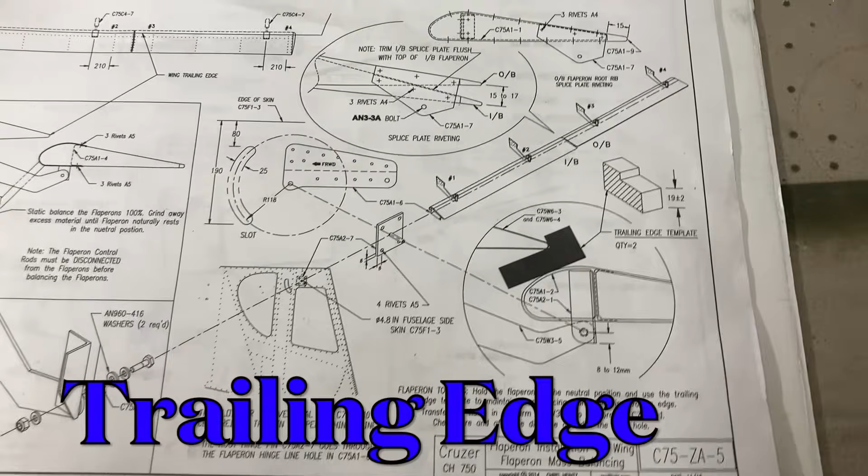The first thing we should go over is this little block here. I made a couple of them. They're supposed to be 19 plus or minus 2 millimeters for keeping the flaperon even with the trailing edge all the way across. The tricky part is this part here.

When we get to it, that's going to be the very last part of the video, when we're making the inboard and outboard connected, so that the outboard is tipped up slightly.

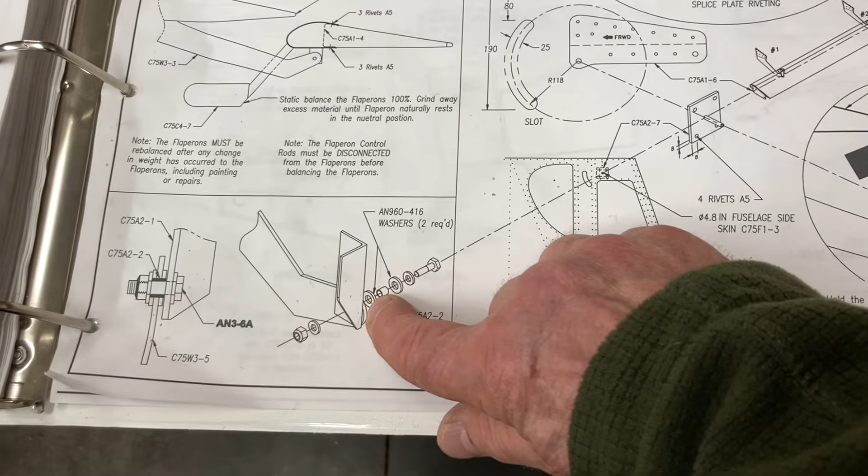This blow-up picture is a little deceiving because that washer is supposed to be between these two parts. I'm going to draw up another blow-up view so you can see how I'm going to do it without looking at this one. This is correct right here - I like that one.

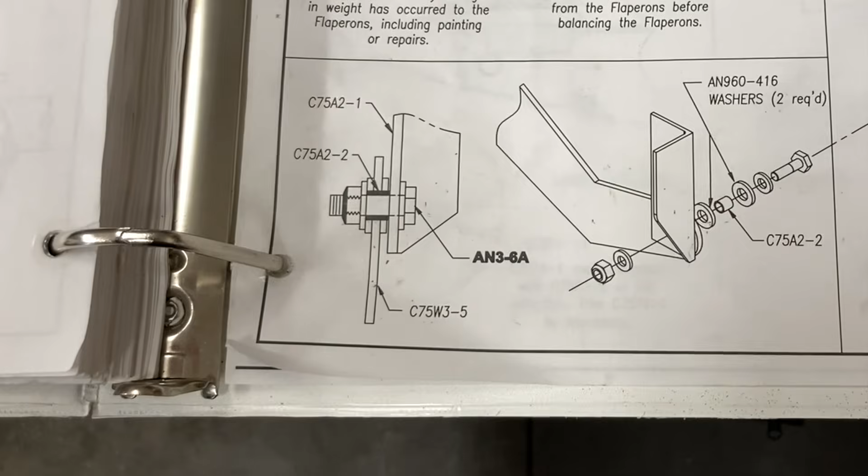The other thing is this part here, C75 W3-5 - that's the wrong number for that part. A bracket in the front of the wing holds the skin. The C75 W3-5 is this bracket that holds the skin and reinforces that interior piece. The part we're looking at here is W3-3, so this part here should be W3-3.

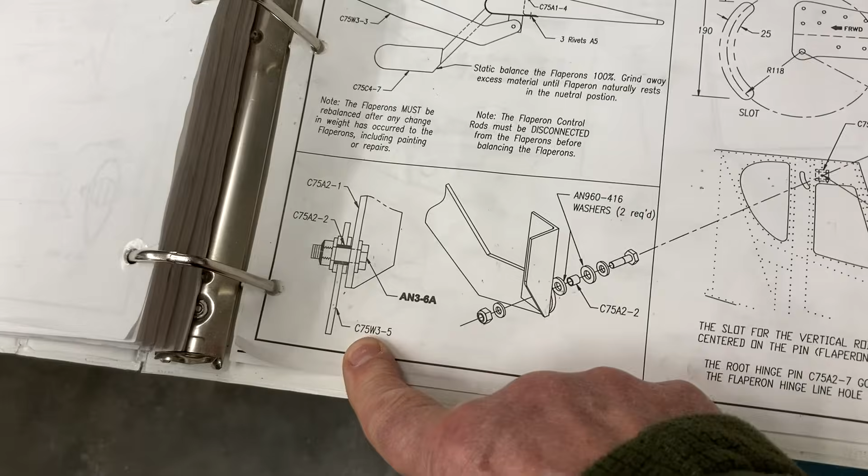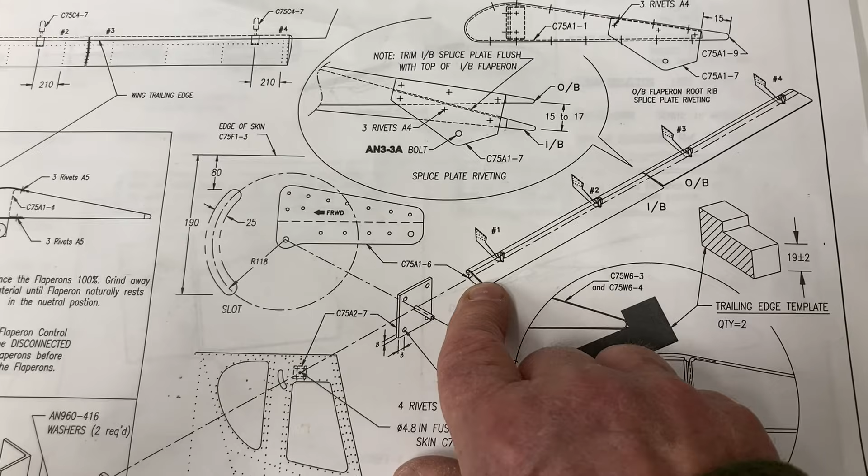As you can see, these all line up to this center point here. This lines up through here, this lines up through there. I get why they blew it up like that - it's really cool. But my starting point, I don't know if that's right or not. This is the way I'm doing it.

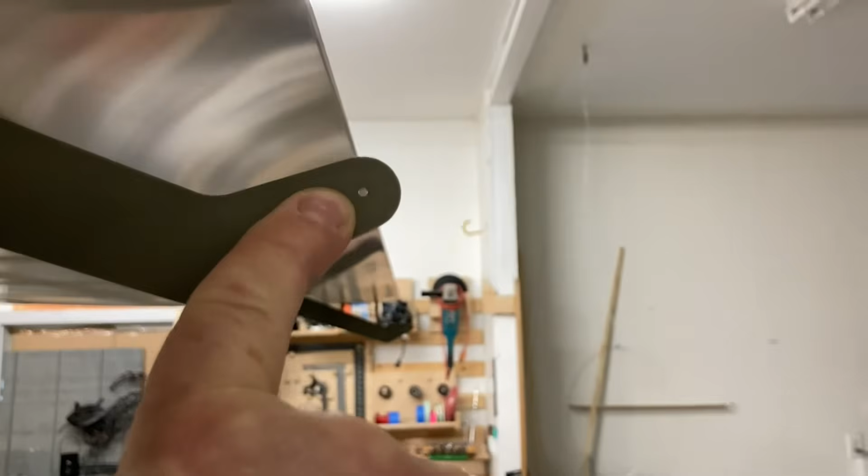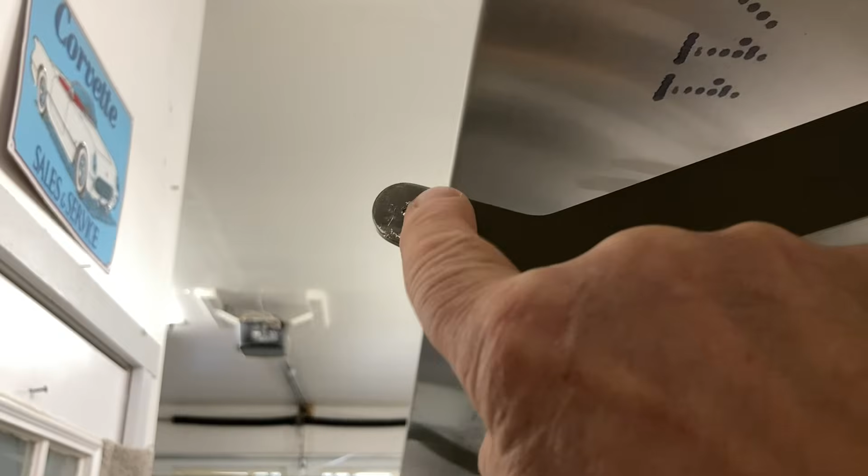My starting point was shooting a laser light down through all 4 brackets. They have a very small hole in them - I'll show you, a small hole in each one down there, and as you can see, those are your pilot holes, the centers. I'm not going to move those at all, we've got to use them.

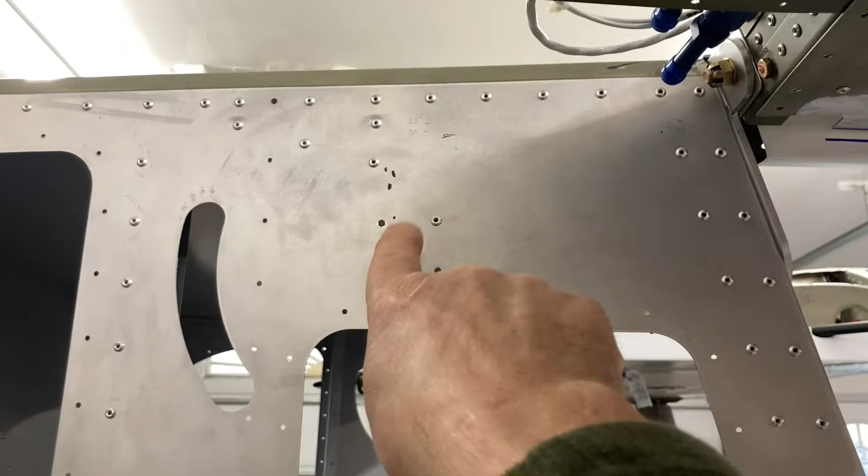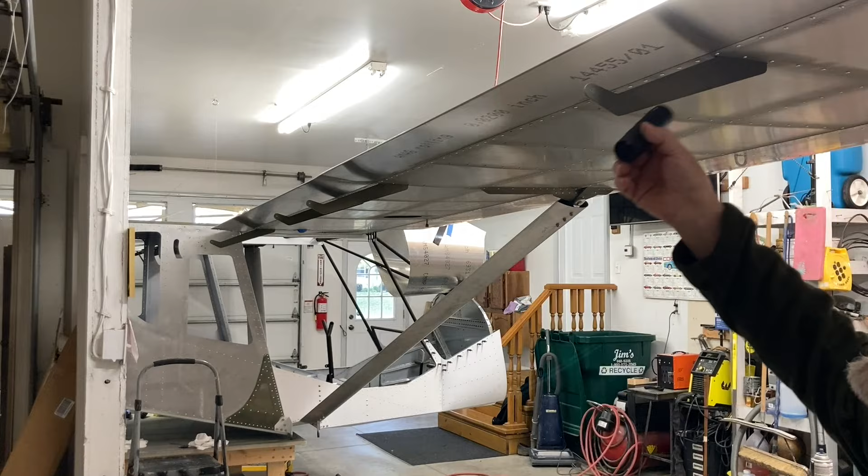I shot that laser down, and that ended up on here, and I put that bracket on, so that is a perfect pivot point through these holes all the way down. If you lined a light up down that, it would hit that. If these were off at all, the light probably wouldn't make it through all 4. This is just a standard laser that won't hurt your eyes because it's a camera.

Anyway, I'm going to start it here, support it with my fingers - I'm a bit shaky, but as you can see, it's lighting up that pole down there.

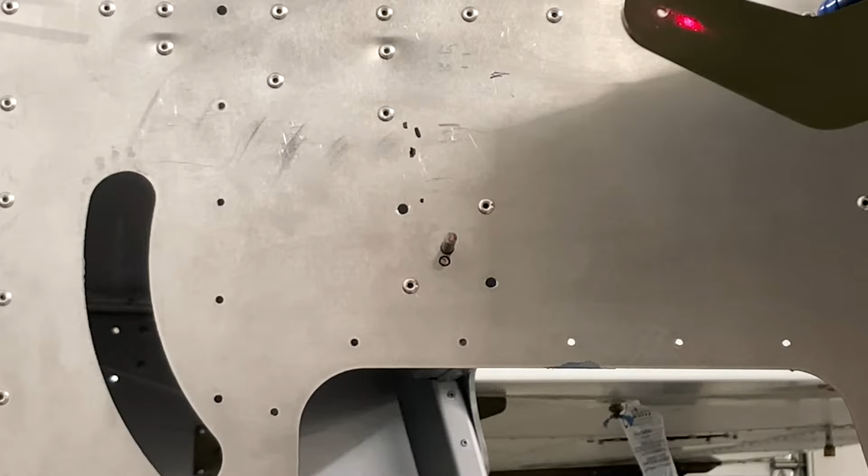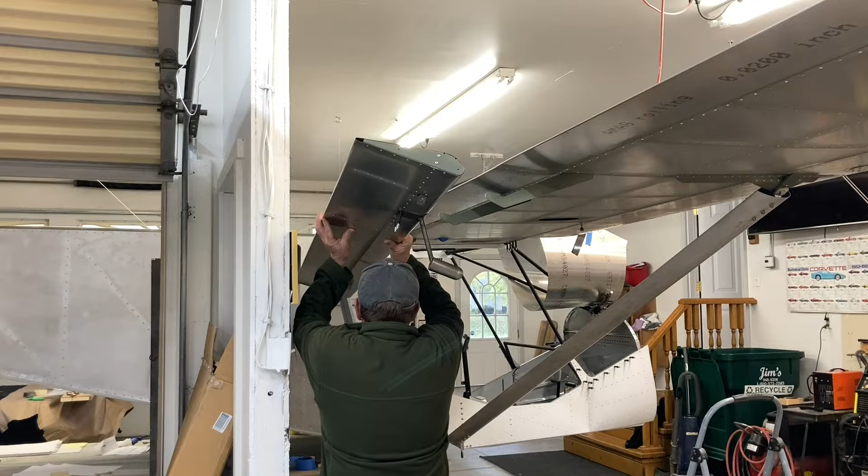Okay, I start with the inboard, for no particular reason other than there's a hinge down there where the light hit. We drilled a hole and installed the bearing. So that is our starting point, because that lines up with all these holes. That was my logic on that.

That'll sit there just fine until I find - needle nose vice grips work pretty good. Anything bigger or thicker gets in your way of marking the hole through this pilot right here.

Well, let's put the blocks in - I've got 2 of them made. This is just a preliminary thing. Center it on your L bracket, put this slightly down in the back because that's where it's going to be when attached to the outside, and lightly clamp that off. Here's my other vice grips - I'm going to put this one up as far as I can so that block touches. Block looks good.

Now the other thing is, I've got a straight edge here with a block taped to it that I notched, and it sets inside of it. That measurement right there is 15 to 17. I've got marks on there.

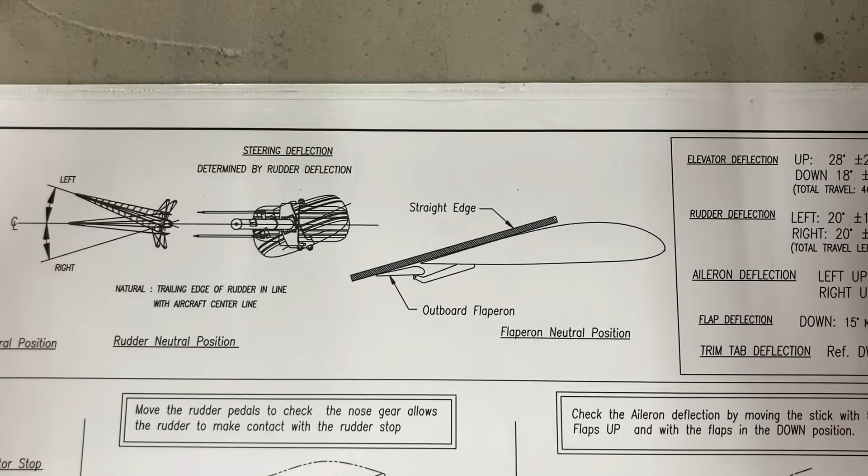That's because when we do the outside one, the neutral position is when you put a straight edge here and touch the center, or that first row of rivets - the second row kind of sits over that and touches the rear here. Then the flaperon comes up and touches - that's the neutral position.

But when these are attached together, this one's down 15 to 17 millimeters. I made a block here just so I could find out when I set this on, that that's the 15 to 17 right there.

Now it's important to tape it off. I slightly tape it off over there because every time I make an adjustment here, the angle changes. So now I can loosen this, put it halfway between right and left on that angle aluminum, angle iron - and that's the angle, that's where I want it.

This one is up all the way, blocks are in there good. Double check our angle. So right there is our neutral position if it was attached to the outside piece.

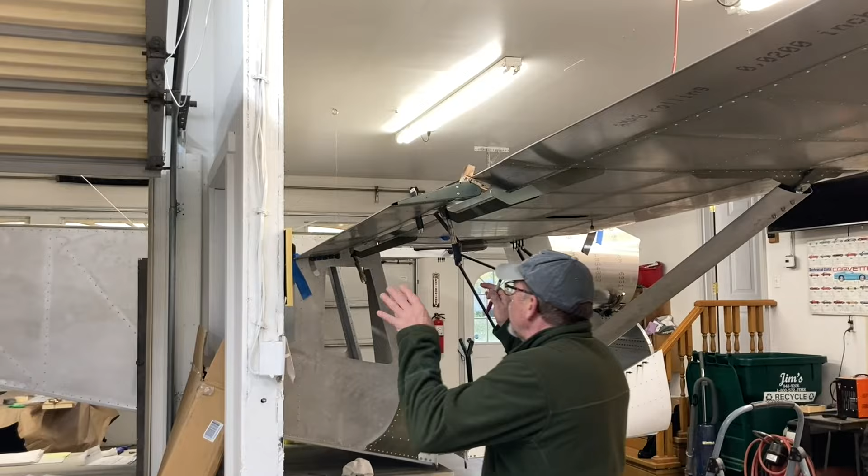Once you're totally happy with the angle, you're up as far as you can go and the blocks are touching all the way along nice and even, then mark your hole.

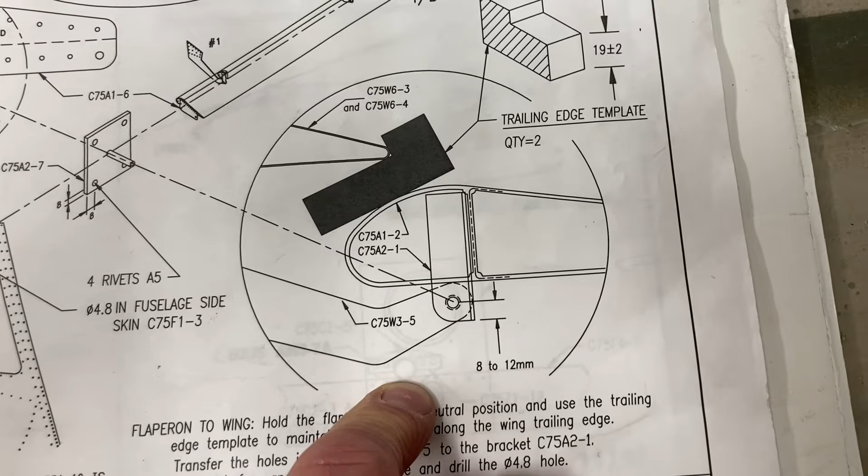Here is our 8 to 12 millimeters up from the bottom where we're going to drill that hole. I'm inside the halfway mark, that's good. From the bottom up to the center, it's 10.4, so that's perfect, right between 12 and 8. If I'm close to it, well, it's closer to 11.

The longer the drill I use, the straighter it'll be. Let's remember, this one is just going to have a bolt passing through it, so we don't want to put the big hole in this one. We want the 4.8, or the one for an AN3.

That's a lot better.

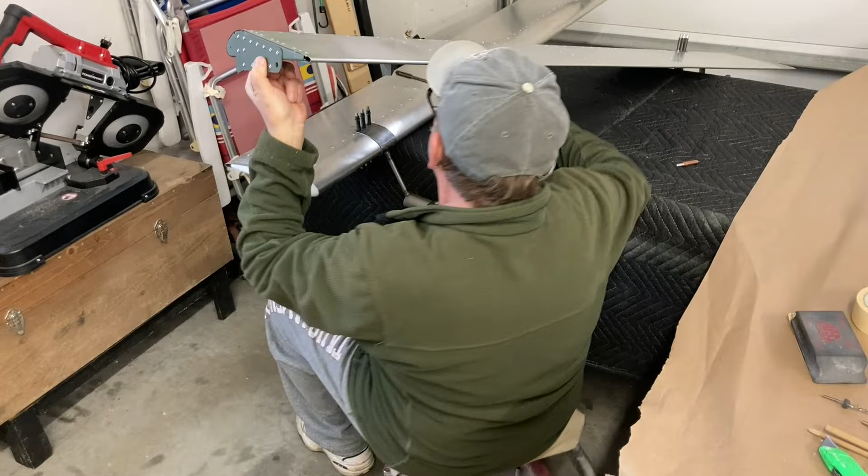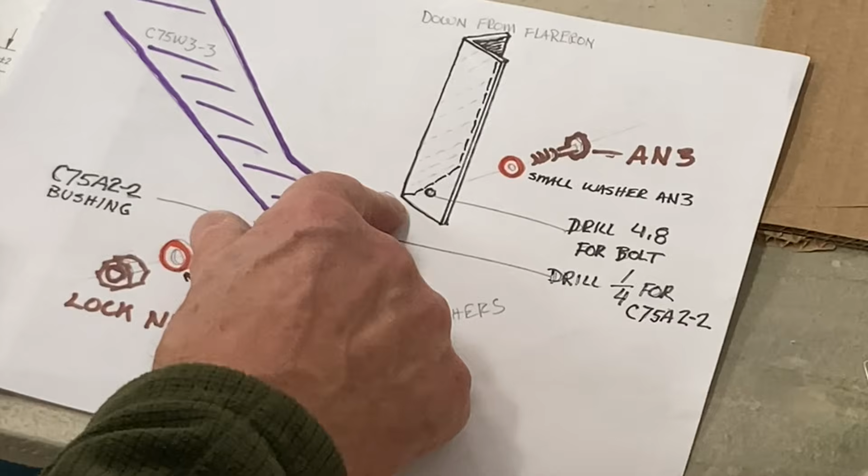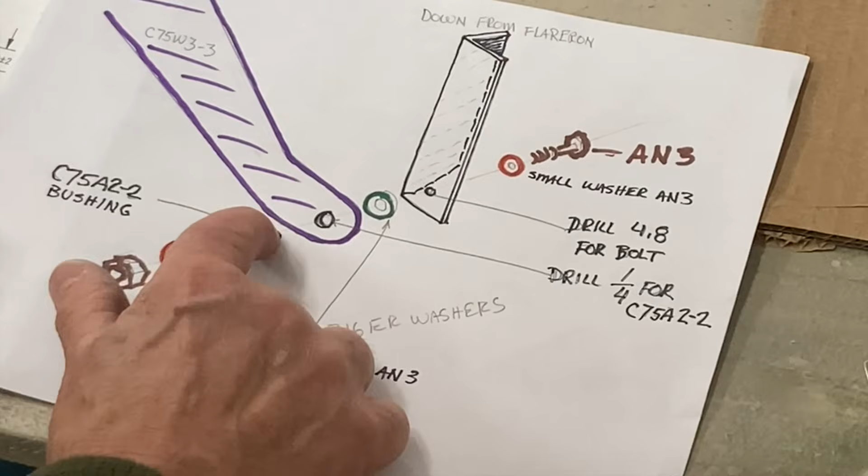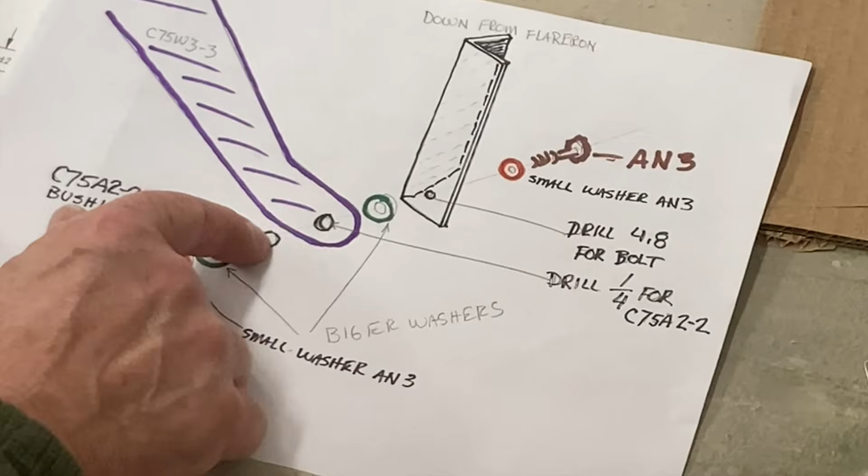Here's my exploded view. We just drilled that hole. That little bolt's going to go through there with a washer on it, and in between the bracket that we're going to do right now is supposed to be a washer with this sleeve inserted through that washer and against the aluminum that we just drilled. Then this is a spacer washer that keeps this bracket off of this washer. This washer here will go on with the nut. We'll tighten that against this wall and it'll all become one solid piece, but this piece will pivot inside the hole that we're going to drill right now.

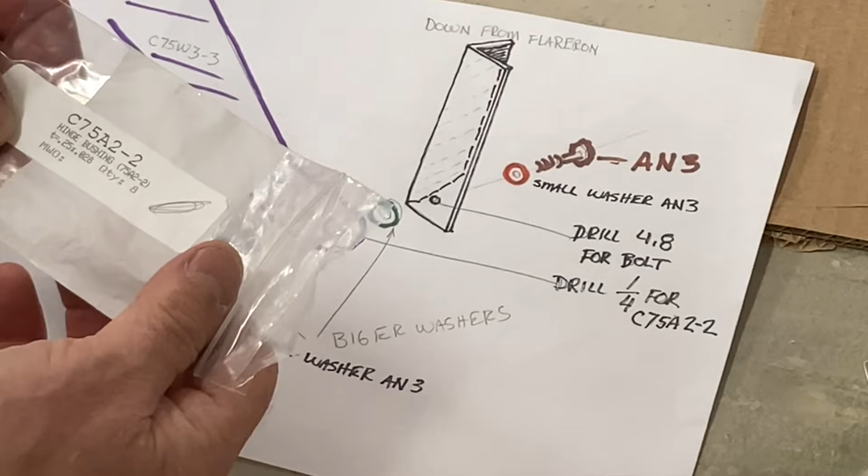And we're going to ream it so that it's really smooth and round, so we want to make sure these little sleeves, I believe it's C75A2-2s, fit in there snug but perfect, not so snug that they can't rotate. I'm going to start with a 4.8, just as square as I can to it.

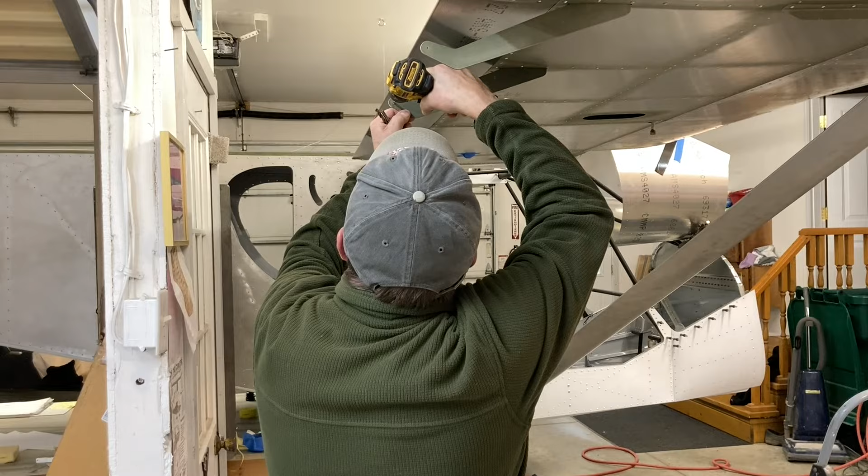What I found was for this reamer, going a size under it, a C as in cat or Charlie, worked really well. I'll double check I grabbed a C. Yep.

Before I reamed it, in case I did something wrong, I double check and the sleeve will not fit in, it's just kind of sitting there on the edge, it won't fit in. Drills by hand typically do not drill perfectly round holes. Oh, that's a snug fit. Once I clean it up, it'll go in, but I'm leaving it just like that. Perfect.

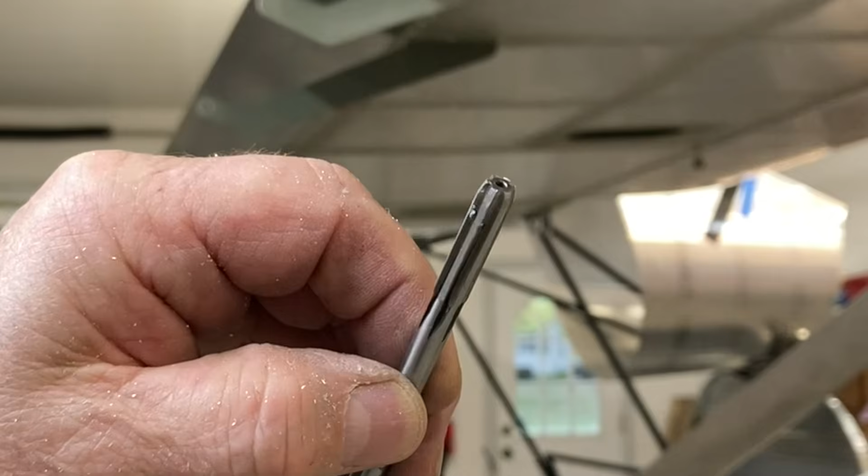In case you didn't catch it, this is a 6.4 reamer, in case you haven't seen one. I'll see if I can get it to highlight. There, see those flutes? They're all straight and flat. That little bit of taper - there's different debates on what size hole you should leave for it to eat out the material.

Bevel that edge just a little, help hold the grease. I'll set the camera up so that you can see over my shoulder when I do this one.

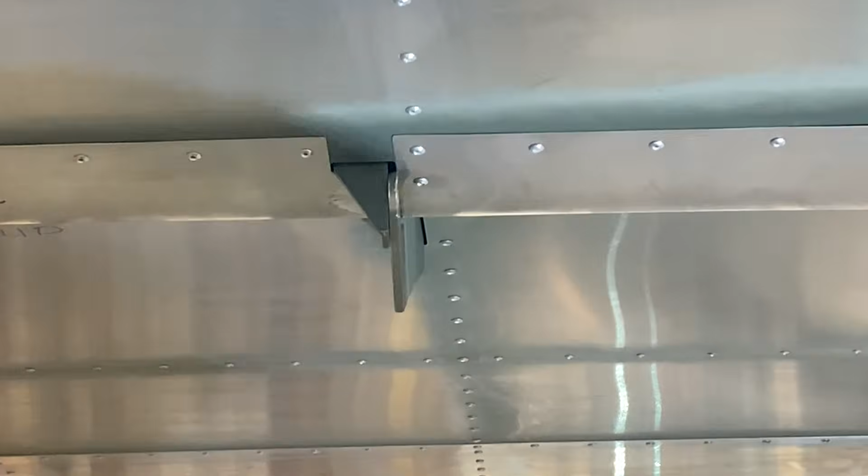What I'm using is an AN4 washer, standard thickness, and I'm going to go in from this side. But we want to put an AN3 washer on the bolt first, then the sleeve. And this is going to be our spacer.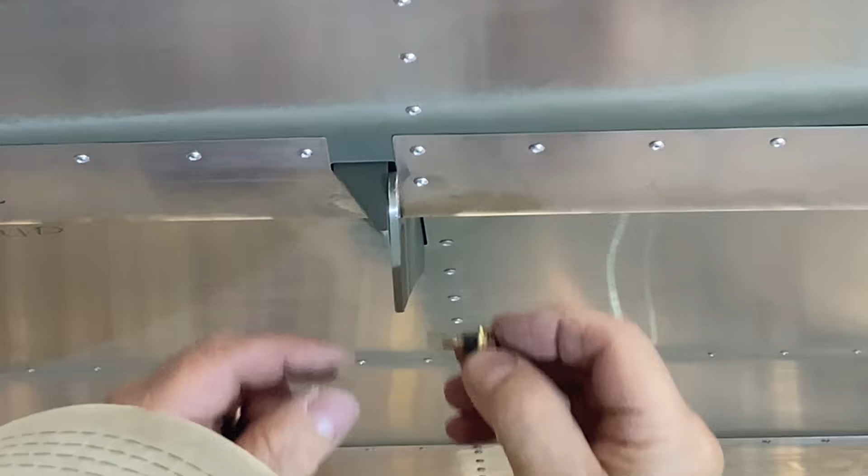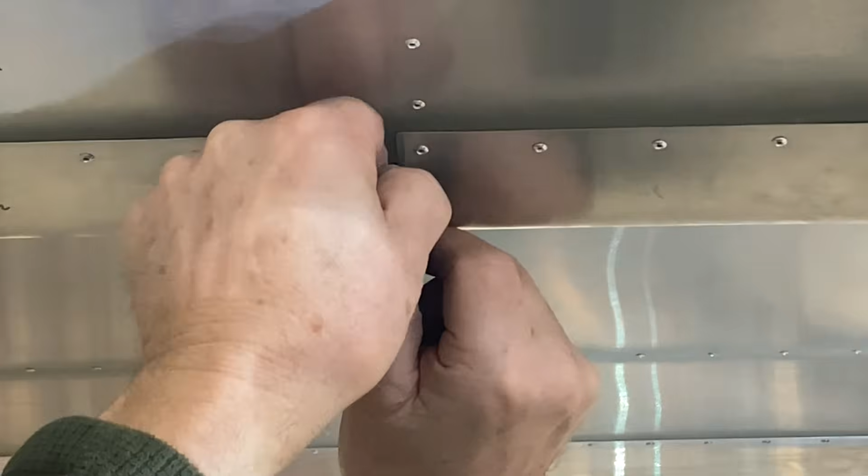And then this is going to go through the big hole, and the bigger hole for the sleeve. But the challenge is going to be this one has to stay, this one has to stay up in between. And there's just enough tension there to hold it, so that's good.

And the idea is we're going to shove this little cylinder, the bearing I call it, or sleeve, through. And now it may be into this, but it needs to - there, now it's through this, but it needs to go past that washer. That's the tricky part.

There, just wiggling it, got it there. And then of course this retaining washer, and this will be a lock - nylon lock eventually, right now it's a castle nut. And that draws up nicely and it pivots on here.

See, the bolt is going to be solid. This is going to be compressed to its torque specs, and that will hold that sleeve in the center of this nice and solid to this piece here.

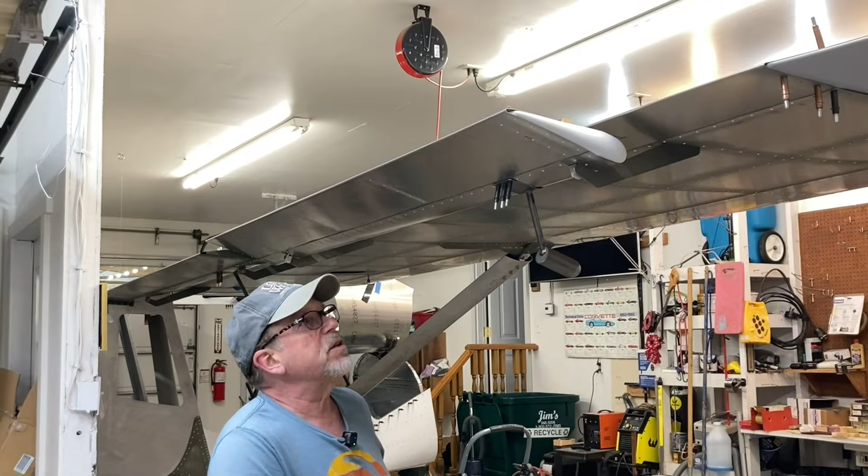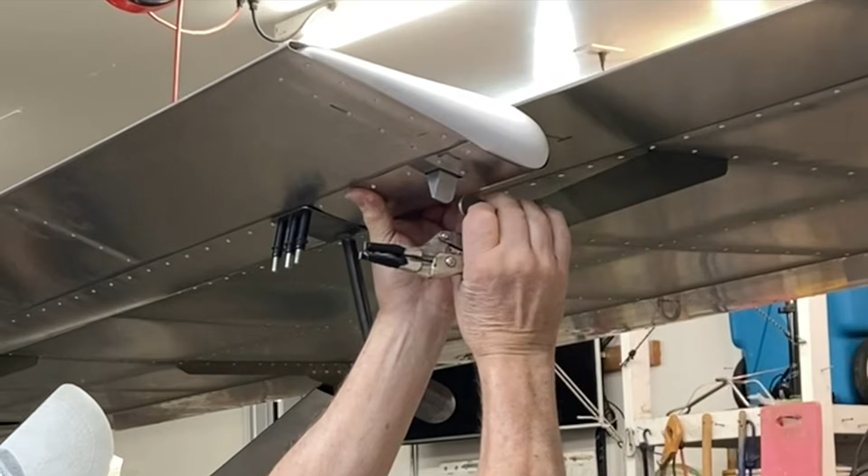It's interesting, it's almost as if the ailerons need to go towards the fuselage a little bit. They're just under a little bit of tension, like it would want to fit on the inside of that rather than the outside of it. I guess that's the way it is.

I can't change anything, so I'm going to start the same thing on this side, but it's a little bit different because the starting point, you still got to use their blocks.

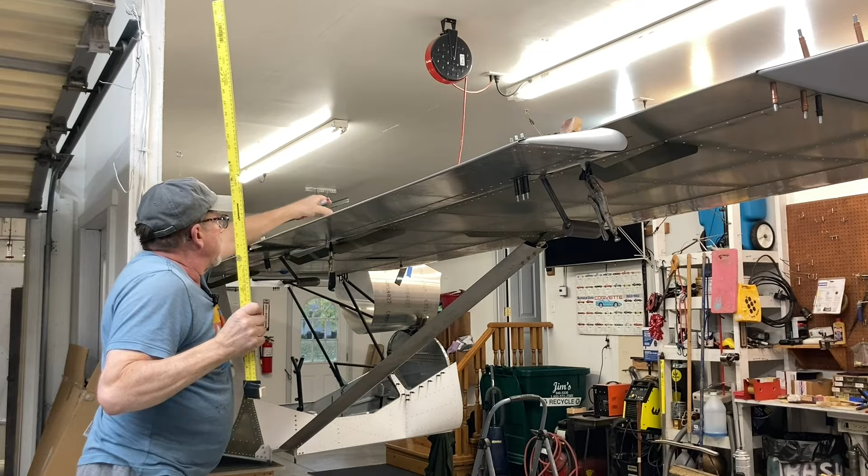But now the neutral position is just straight. So we got our blocks in. Start out close to the neutral position. There's the neutral position. That's touching.

The round part of this is just sticking out the back, which I like. And this one is just sticking out the back, the radius of this arm.

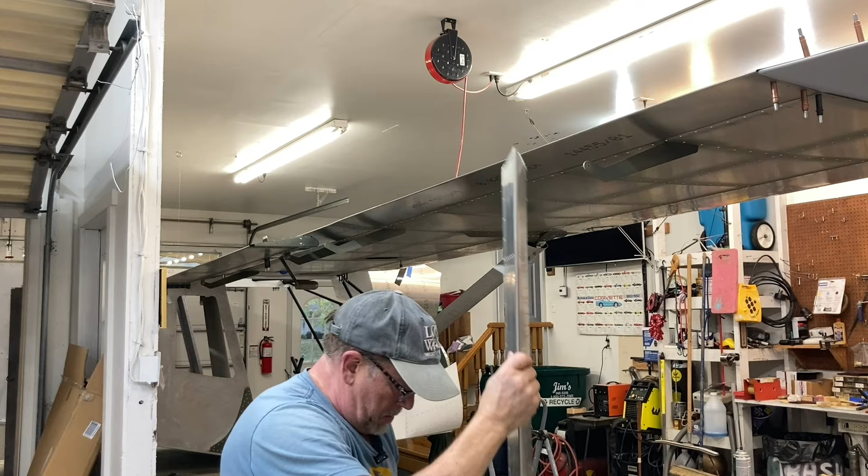Oh, that one's close to the 8. This end must have been a hair higher. One's about 10, I think the other one's 9. Let's go measure them.

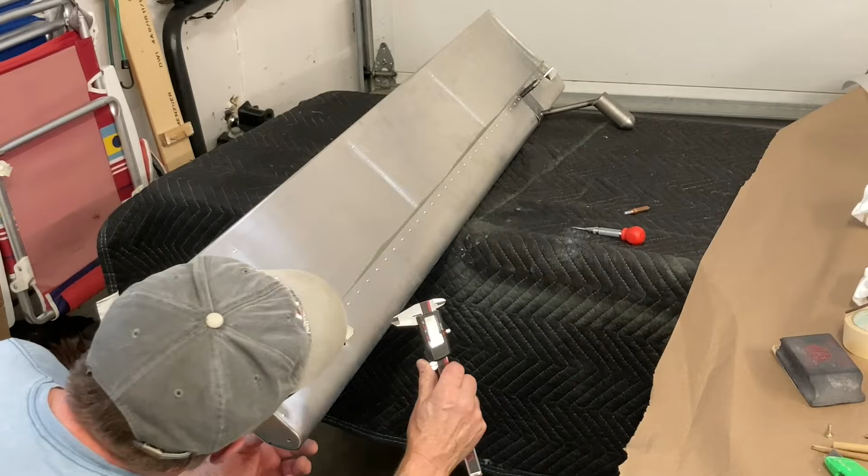All right, that couldn't be more in the middle. That is really nice. Now, the way I could make it tighter without raising and lowering is to move my hole backwards, which would move this forward and closer to the wing.

But let's just see. Right there is 8, almost 9. So that's within specs. That one's 9.3. So that's well within specs also.

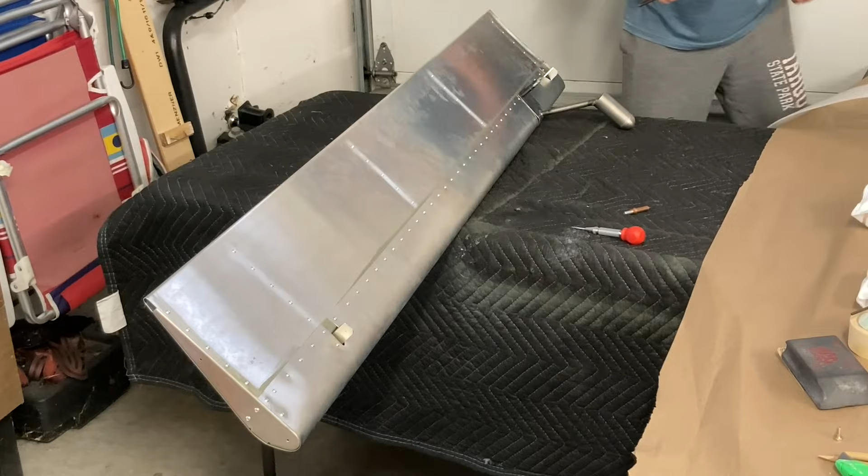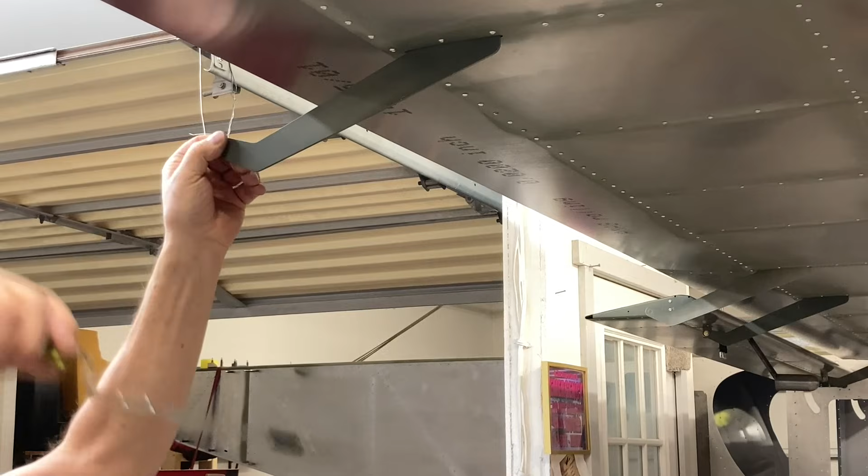Since these are where they're going to be, all I got to do now is ream those other holes out. Those are easy to do. They're stressful before you do them. Then you just clean up the edges and the sleeve should fit right in there.

And then of course, once I get these 2 completely bolted up like I did the other 2, then we can start positioning here for those 2 brackets in the center that hold it.

Well, it's pretty easy to do, but don't flip this around so that the hole's nearest the front. It's got to be towards the rear. And this is how it's going to end up looking with this outboard, going to be 15 millimeters to 17 millimeters higher.

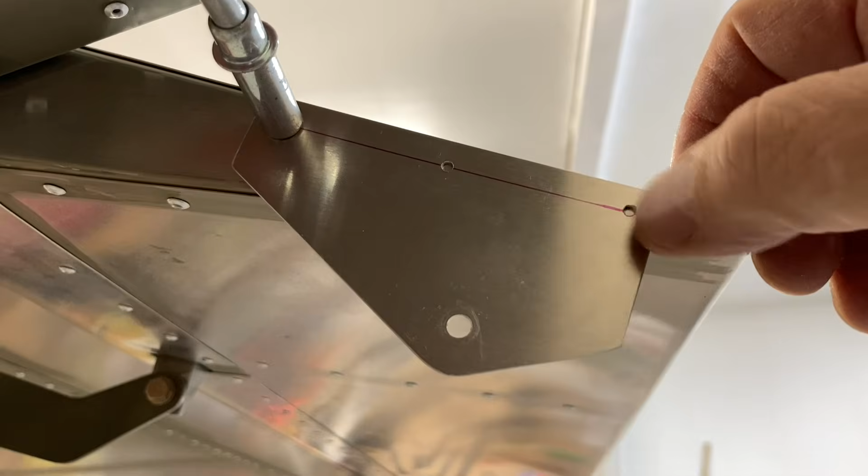So I'm going to just flip this up out of the way. Put these as far forward and far back as possible. Lined it up with the inside back of that rib, even across the top.

And this hole is forward as possible because there's a little lineup hole for this side rib that it's going to go in, and you want good edge distance from that.

And then now that I set it up and drilled the holes, you can see this little retainer hole for the rib is awfully close. So if you accidentally put that back too far, you could be on top of that.

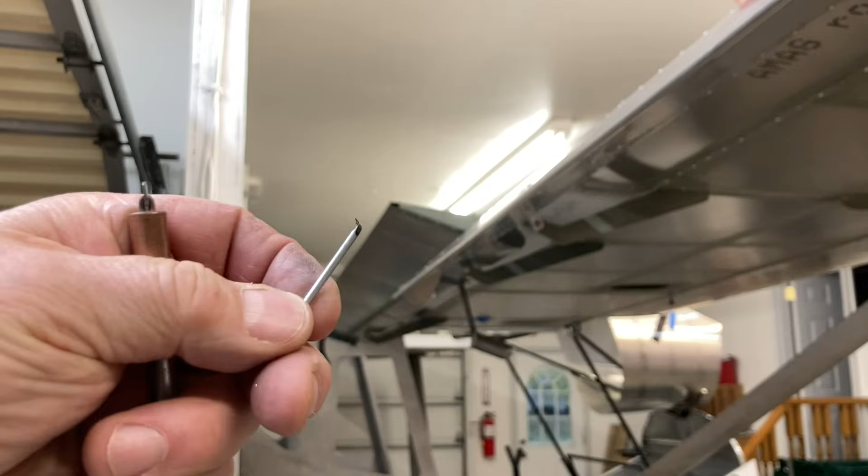Another quick thing, if you don't have a denibber for something that's completely together, I just take a rivet and grind it flat on both sides, down about a quarter of an inch until it's sharp on one edge, bend it over about that far. You can reach up in there and just ream it around in those small holes, and it works good.

I don't feel any binding. Now put your finger between here, and if they were fighting each other, it would squeeze your finger or loosen.

First thing I'm going to do is cleco this up to it, and then the outside, the outboard, is the one, and line these up so that they're the same shape. I'm going to go 17.

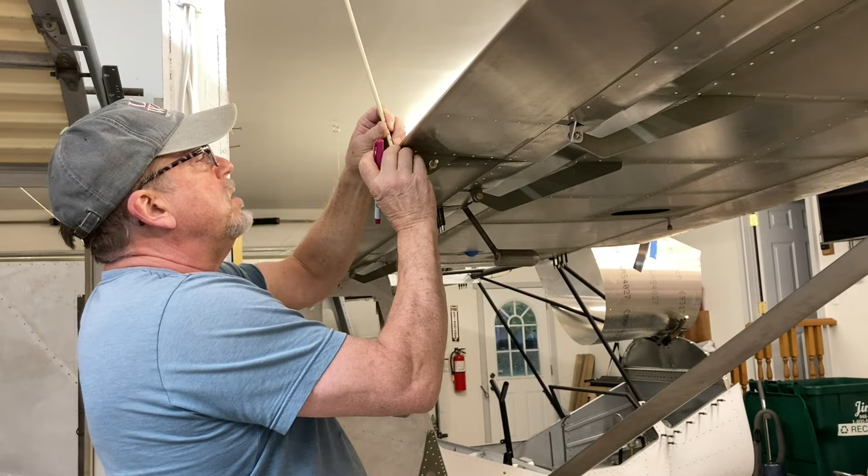Right there. Now you just make a line on the back side, according to the top, right here, right here. And then when I cut this, trim that.

The hardest part is getting it to drill through in the right spot. I'm going to double, triple check this.

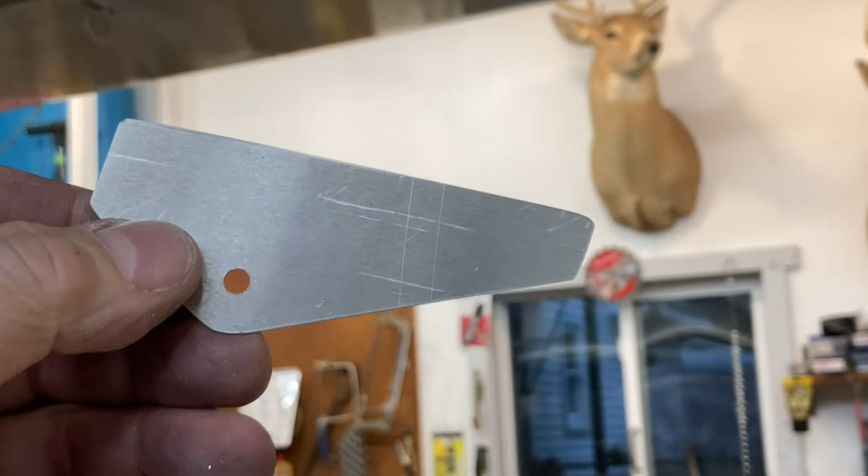First thing you want to do with this is lay out your holes on it so that you'll have something after you tape it up there to drill through.

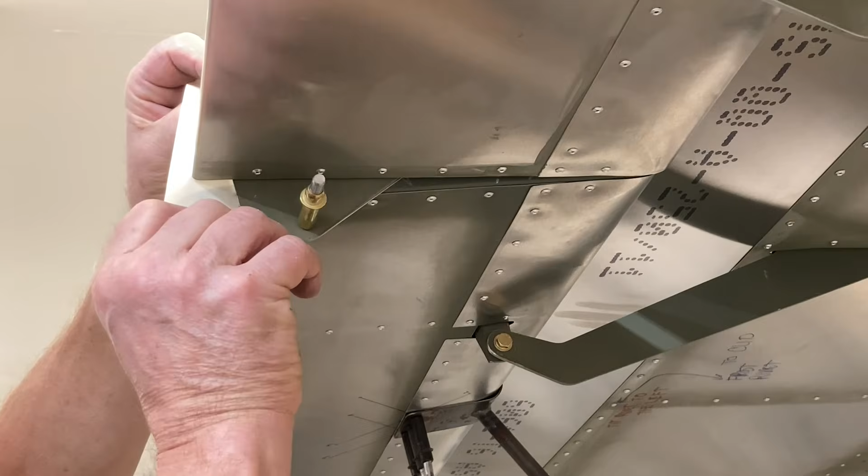It's kind of the hard part, getting it taped up. Slide this between the two. That's the ticket. Lower it down. Slide right behind there.

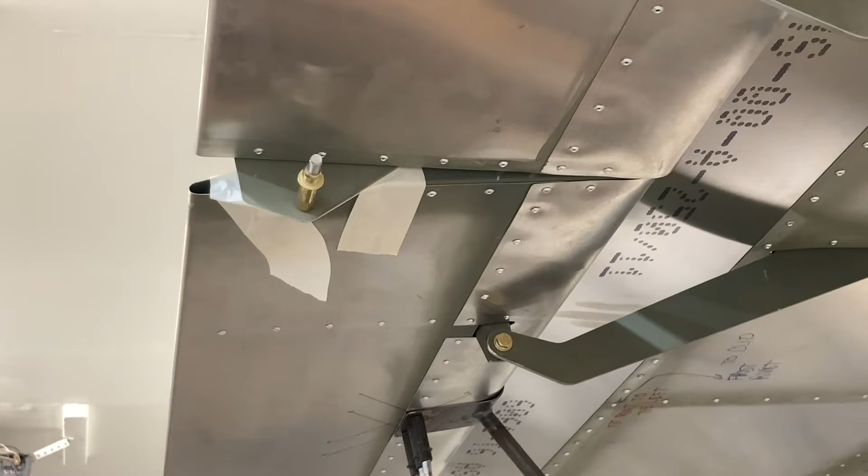Now I need my measuring stick. Let's take this off and get that out of the way. And I think I'll have to trim that down a little more.

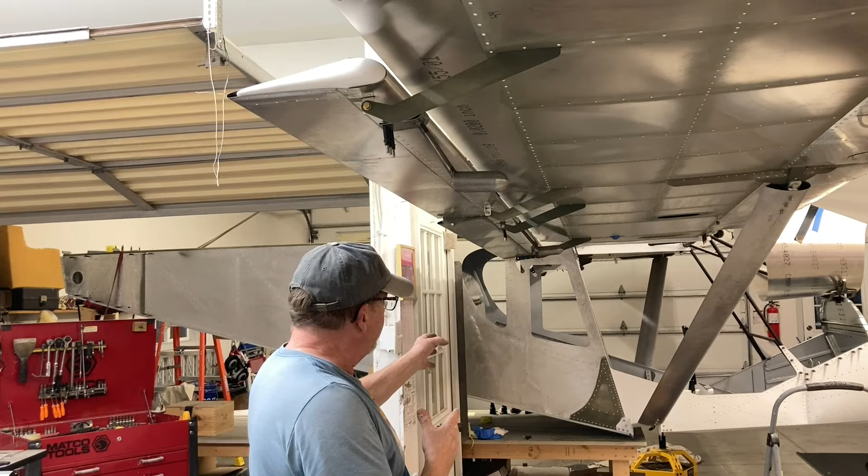All I got to do now is take the wings off, put them back in their caddy, and I can get the fuselage put back over here, and we get a garage back. But I got to get a couple guys yet.

I'm filming. That's all right, I don't care. I'm done. Hi, baby.

Have you seen this, or have had this happen where the inside rivets are rubbing, because these all want to push it that way.

What did you guys do about that? Did you just put a shim in here and shove it out just a little further? A couple washers or something? But then it would push all these little horns over just a little more.